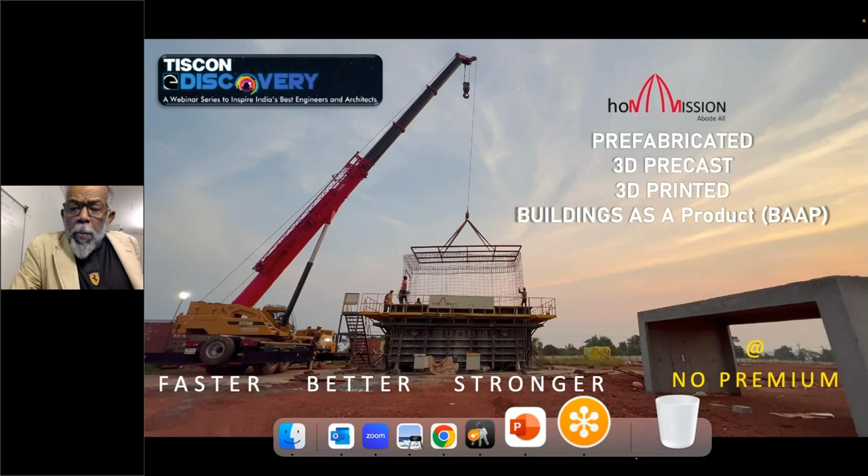Now, when we do this, can we deliver the building faster? Can we deliver better buildings? Can this building be stronger? And most importantly, in Indian context, can we do faster, better, stronger buildings without charging an additional premium? Yes, we can. And that is what we have done in the past about 10, 11 years. And that's the discovery we will get into now.

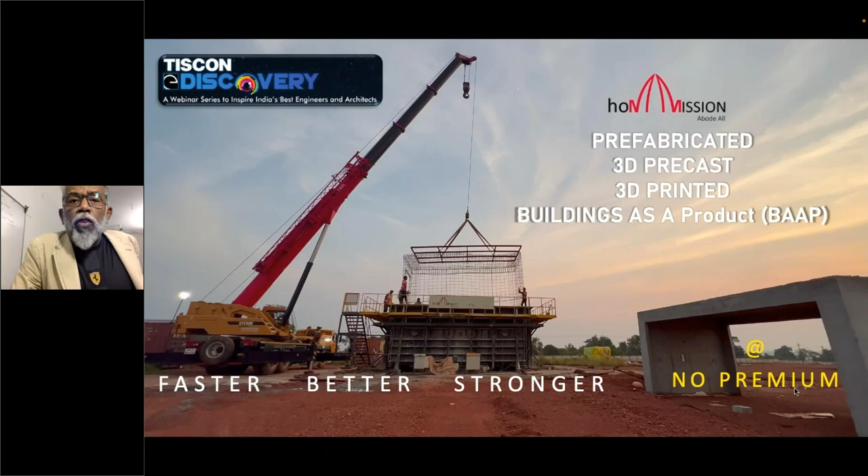That was in use ever since the Second World War. And in Singapore, for periods like 40 years, it was on. And it had its own advantages as well as challenges. We were talking about level 2, how you can manufacture, let us say, an RCC building as column separate, beam separate, wall separate, and join them together to make one room. It had its own advantages. The challenges were too many joints, too many connections, and hence possibly an extreme level of workmanship required, and managing these kinds of multiple pieces was proving to be a challenge in various ways.

Hence, the industry moved on and said, can't we make the whole room in one single pour, as one single piece without any joints, and then connect those rooms together to create the building? This whole movement from level 2 to level 3 began way back in 1997, but it got adopted in different continents and different countries gradually. As you know, in construction, everything has to be tested, proven, accepted before it is deployed. So this level 3 started happening somewhere around 2010 onwards. In Singapore, they call it PPVC, precast, pre-finished volumetric construction. In Hong Kong, they call it modular integrated construction.

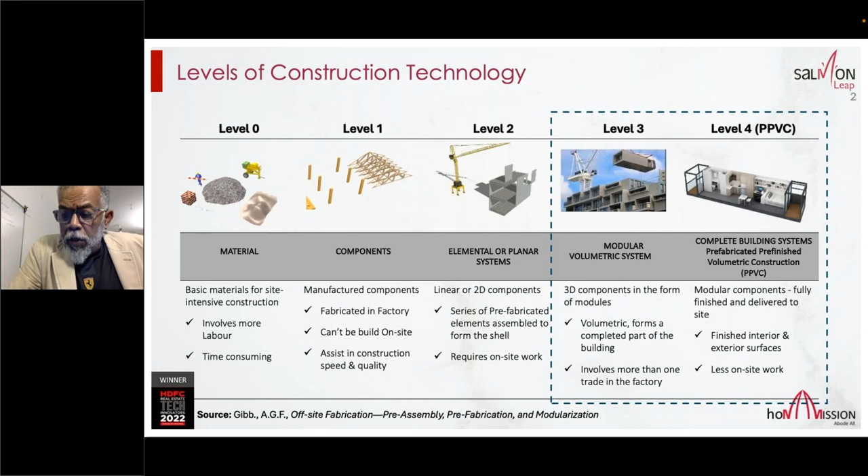So what are we doing in India? We jumped straight into level 3. The 5 sides of the room can be manufactured in one single pour, made at the site itself, and erected into a building. That's what I want you to discover today. I'm changing to the next slide now.

I will now continue with precast, pre-finished volumetric construction. Like I said, these modules are 3-dimensional and they are freestanding. They don't require any propping or any support at the time of erection. Internal finishes, fixtures, fittings can all be done in the factory itself if it is a 6-sided module, and we can manufacture it either at site or away from site and bring and install.

Now, obviously, all of you would have guessed there are lots of advantages. You could increase the productivity per person up to 40%. Today, we have increased it far higher. You would see how we did that. Since the Singaporeans did it in 2011-12 onwards, it's more than a decade. We have changed a lot of things. Because it is manufactured in a factory, it is like a manufactured product. Quality is assured. It is not left to the hands and skill of the worker anymore.

So if we have to do all of this, what is it that we had to achieve? We had to look at things right from the design stage itself. In these 10 years, for those of you who are architects attending this, we today have a practice in architecture which is called design for manufacturing and assembly of buildings. In Singapore, they call it DFMA.

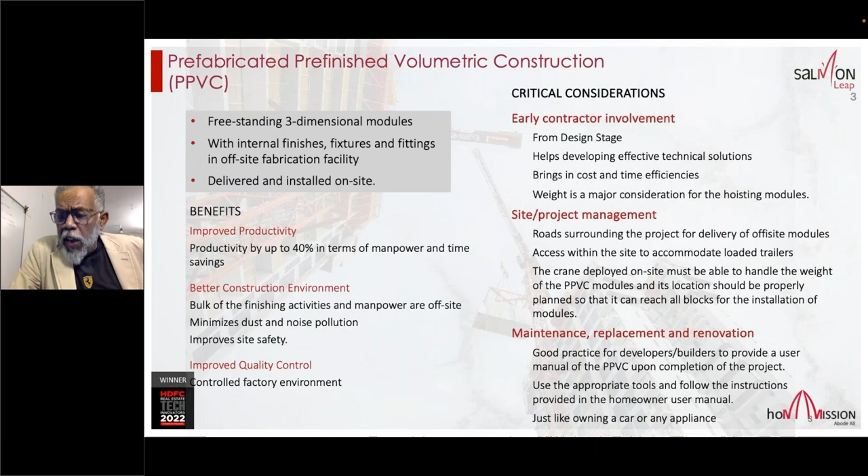And do we have standard practices documented and issued for this kind of manufacturing building as a product? It wasn't there about a decade and a half ago. It was still in the works. Today, all of them have become available from different countries and are being adopted for the Indian situation. So having said all that as the background, let us look at it from the structural point of view, from the architectural point of view, and also from the MEP point of view.

If we're talking about manufacturing building as a product, it is not just the structure, not just the rooms. Whatever has to go into those things also has to be designed for manufacturing, and the entire ecosystem has to be in place. Has it come into the country? Yes, it has come into the country. Has it come to the level that it is in Singapore? Not yet. Have we picked up momentum? Yes, we have picked up momentum.

You would see in the subsequent slides how Tiscon, over these 5-6 years, as far as the reinforcement, joints, connection is concerned, how they have productized, how they have removed the need for tedious labor involvement. You would see that. And in MEP, similar things have been done. Can we have modularized MEP, which is available, which can be installed straight away?

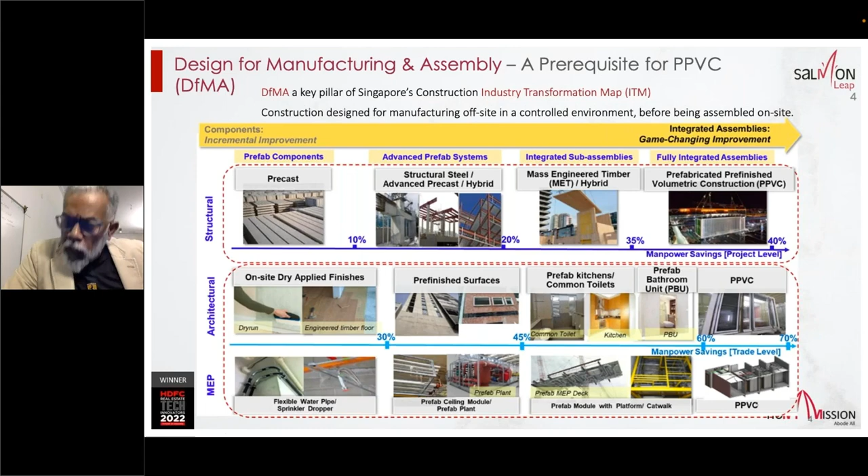Yes. So as you see in the last column, PPVC, we have structural PPVC elements available. We have architectural PPVC elements, including ready-made bathrooms with all the plumbing lines available. We just delivered one yesterday for one of the large companies of India. And we are right now working on getting the MEP also modularized, so it becomes truly designing for manufacturing and assembling the building as a whole. That is where we are.

So if that is the case, some of you who are engineers and architects there would be wondering, how do I get into this? What are the things that I need to achieve if I have to succeed here? Fundamentally, the 3-4 points which we need to do is, can we reduce the total number of components that make the whole building?

If we have made it more and more integrated, a whole room, or a whole room with balcony as well, or a whole room with balcony as well as the floor, or with whatever has to be installed in that, the further we go, the lesser the number of components that have to be handled, which means it reduces the assembly cost. It reduces the work in progress. Otherwise, too many elements are WIP and their inventory holding happens. And minimizing the number of components also enables or simplifies the automation.

Now, another principle that we try to follow, which DFMA prescribes and teaches us, is how do we design it not only for manufacturing and assembly; at the time of fabrication or manufacturing, how do we simplify the geometry without unnecessary non-functional features, which in conventional construction we have been adopting extensively. The more we standardize, the fewer molds we require, which automatically reduces the capital expenditure the project requires. So that is another principle we try to follow.

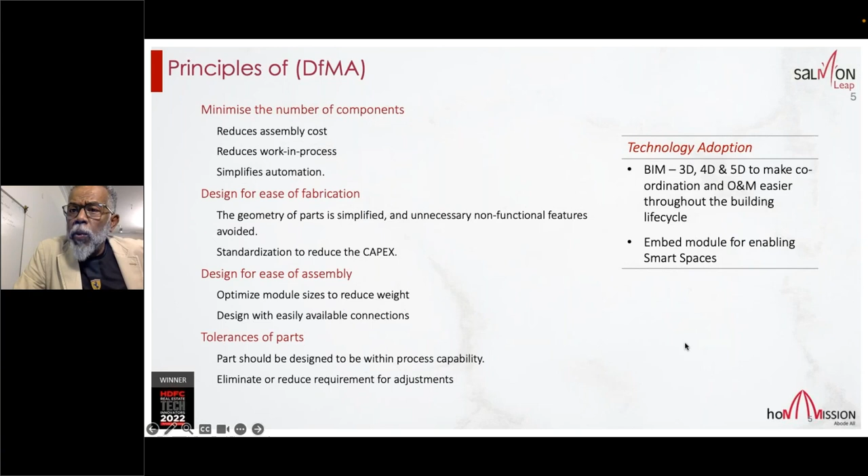Now, all of you, particularly those of you who are the engineers and the architects already know, beyond the hype of BIM, we have now started actually using BIM, at least in projects like airports, in projects which are now coming up, like for the semiconductor. In these areas, we do use BIM extensively because the tolerance there is extremely limited.

So, in addition to all of this, how do we take into account the transportation requirement if we are not manufacturing at site? If we are manufacturing at site, we have more elbow room. Otherwise, we have to make sure the dimension of each of the elements is as permitted by the Indian motor rules. We have examples of how they are moving on Indian highways, whether it is a windmill or the car manufacturers, from the northernmost part of India to the southernmost part of India.

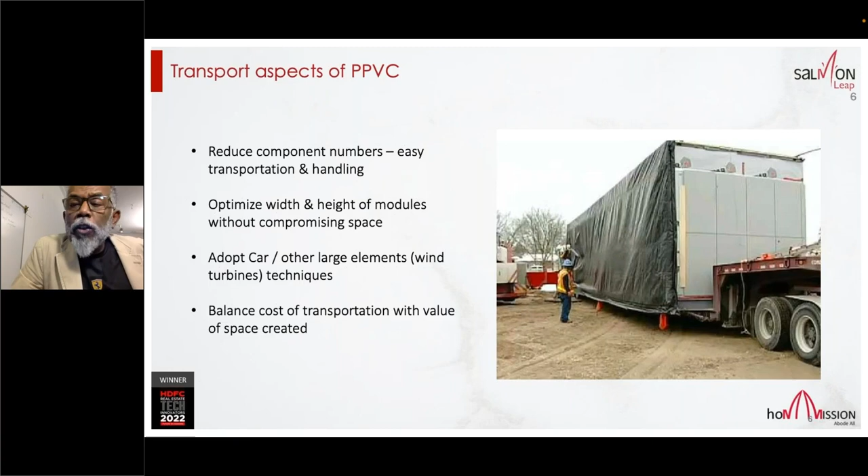So we do take these guidelines which are available there to size the rooms or the manufactured part of the buildings, and there we keep in mind the cost of transportation versus what is the value of the module we are transporting. So that dictates how much distance we can transport if we are going for offsite production. Okay, so that is all the design principles.

Now, can we have one mold, one machine giving us different lengths of room, different heights of room, different wall thicknesses, different openings? Has the system matured? Good news is yes. Now, from the same machine, you can manufacture a 3-meter tall module or a 3.125 meter tall module or half the height module. Length can be full length, half length, 3/4 length. Wall thickness can vary from 90 mm from the same machine to as much as 200 mm. So the technologies or the methodologies that are now available in India permit all of that.

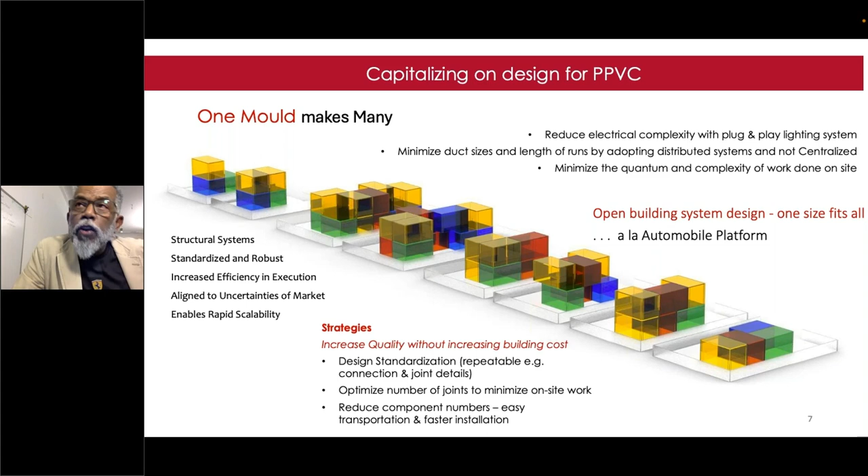Okay, is it only concrete that we are talking about? No, it can be a pre-cast or a fabricated module. If you are talking about a prefabricated module, their structural elements are steel. The rest of it can be any other material, whatever is suitable to the building code, the seismic zone, and the climatic condition. Both are available.

In the case of concrete, it is typically monolithic, one single pour. All walls and slabs are poured in one pour, no joint. If you're going into steel, obviously you need to have structural elements in steel, and other material which is sustainable, which is thermally more efficient. You can use those things.

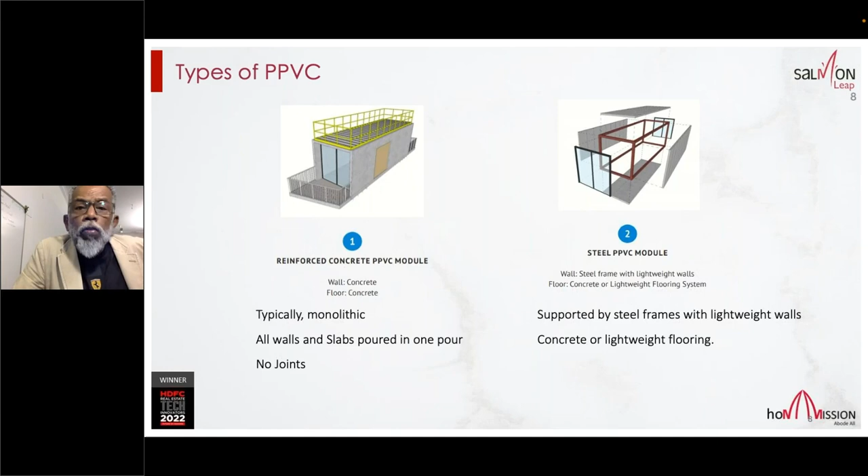How far have we come in 3D printing? I'm sure all of you are tracking. Today, we do have prototypes or example sample projects, whether it is a bus shelter, a single unit printed inside IIT, or a post office. These things are happening. What is holding it back? Advantages: you can design a building, feed it into the system. The system will feed it into the printer, and the printer will print the whole structure.

What are the disadvantages? Can it take reinforcement? Not yet. Do we have high-rise buildings that can be manufactured and installed? Not yet. It will come right now. If you want a curvaceous shape, in all these examples which have been done in the country, you would notice these are all non-linear. For those things, the machine can be taken to the site and manufactured at the site.

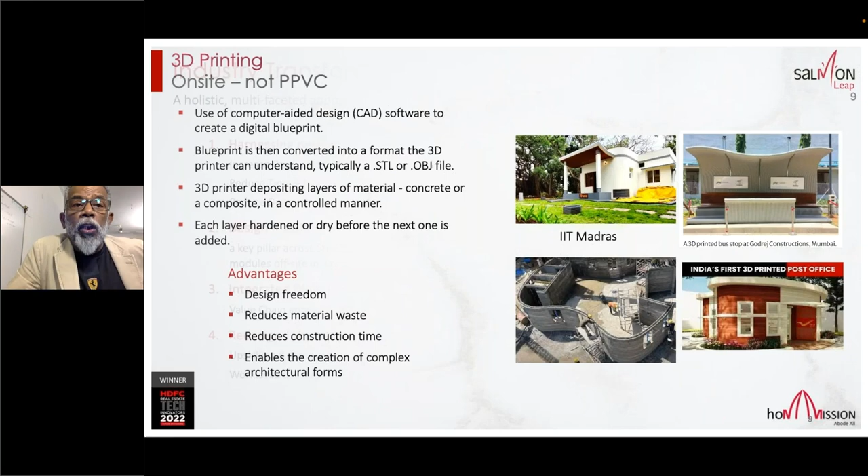So all of you here attending this, hundreds of you, and us, if we have to move construction from labor-intensive, manual, sequential, fragmented into manufacturing with guaranteed quality, there are a few things that we need to do. We talked about design for manufacturing and assembly. We can now talk about: can we deliver the whole thing, from procurement to planning and execution, handing over, by one entity?

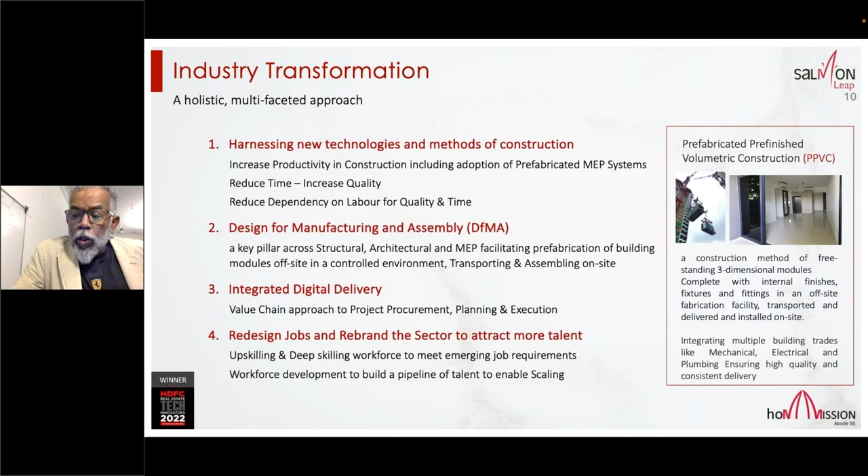Yes, it can. And what are the technologies that are available? We only talked about one of them so far in detail. The rest of it is all maturing in the hands of different people and different entities. So has it gone beyond DFMA? Have countries pulled in academic institutions, building material manufacturers, building product manufacturers, and have they all arrived at certain common rules to design for manufacturing and assembly? Have they started creating platforms? Have they written rules for platforms?

The good news is yes, we can share all of this. This is an effort by 600 plus companies, plus universities, plus governments. They have worked on this for 5 years. And this is what we have brought into the country through the joint venture with Indian Institute of Science. As you can quickly see, the rule book says whatever you are designing and creating as a platform, it should be deployable and configurable as you need, and it should have as many common repeatable elements as possible.

This is not new. This is what the manufacturing industry has been doing and how it has evolved. It is just being adopted in the construction industry so that we can shift it from manual to manufacturing. The interfaces also have been standardized, and it should be an open platform. It is not proprietary. That is why all these companies came together into the Construction Innovation Hub and made these things available. And the three critical parameters: one, it should be recyclable. It should be circular economy.

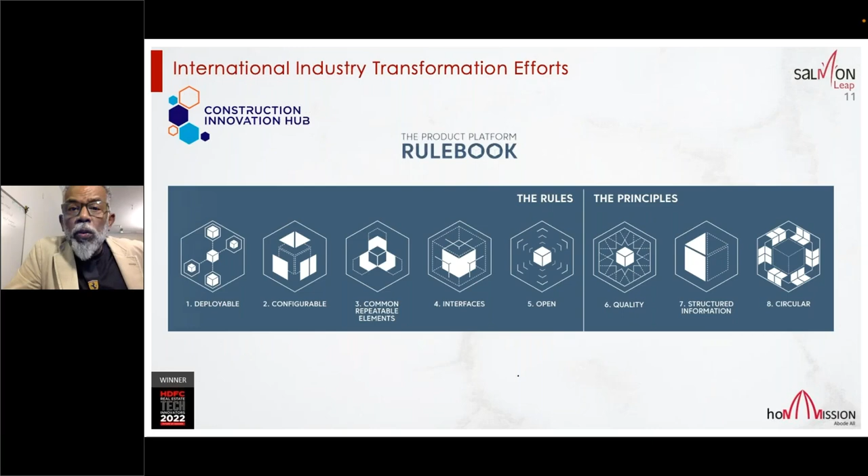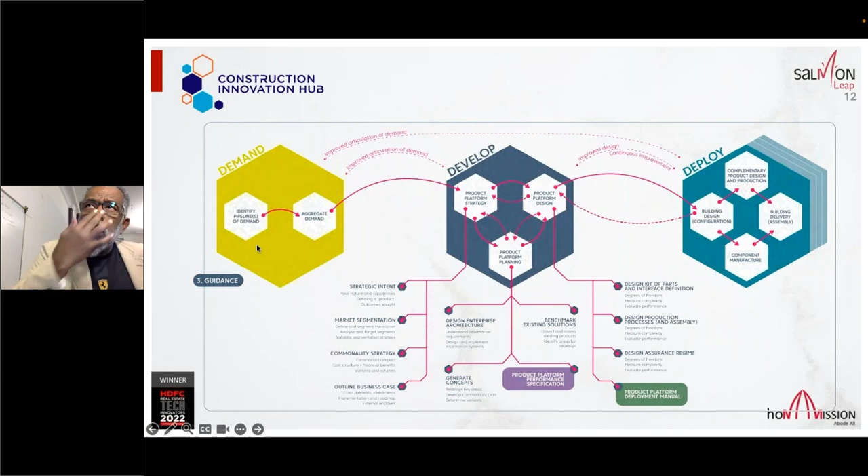What have they done to ensure this? These are all laid out in this. And structured information: it should flow across the value chain, across different platforms, without any proprietary hold. And quality is key. This has already been achieved, and it is being brought into the Indian market. I don't know whether we will have time to dive into the details, but we could do a deep dive into what the Construction Innovation Hub has done, starting with what demands are crying out for this kind of design for manufacture and assembly.

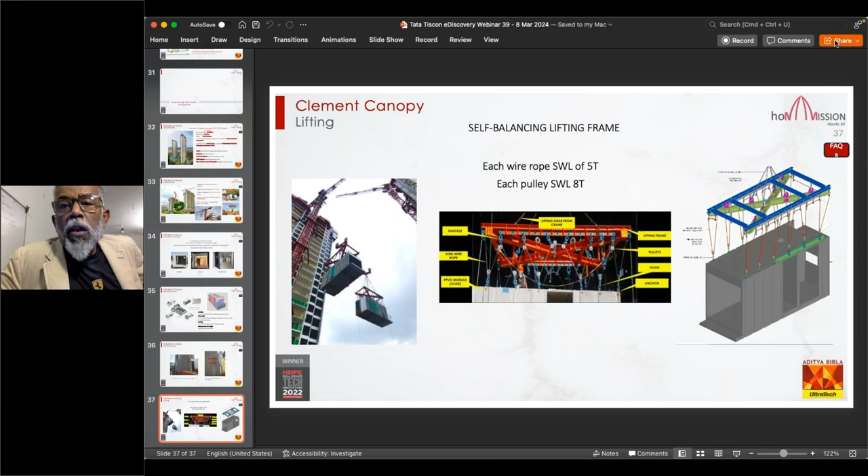First question that we have is from Amrit. She wants to know which of these systems are eco-friendly. Yes, it is as eco-friendly as a concrete building can be. The other elements of eco-friendliness are that we are avoiding waste, saving time, and reducing the quantity of material. From those points, yes, in comparison with other RCC buildings, they are. But if we want eco-friendliness by changing the material, then we have to look at alternate material, embodied carbon, and the consequent sustainability criteria. Vis-a-vis concrete, yes, not significantly, marginally.

Okay. And what about the seismic performance of these buildings, sir? This is a question by Ravindra. Like I said, you should take a look at the notification issued by the Government of India, PWD. They have recommended this for all types of buildings, all heights of buildings, up to seismic zone 4. If you are going into seismic zone 5, then the connection details require further strengthening.

That is from the government or regulation point of view. But intuitively, as an engineer, as an architect, or even as a layperson, you would have noticed every single rebar that goes into the structure is cross-connected in both the directions. You know, the seismic resistance we bring by cross-tying the load-bearing elements. The columns are cross-tied. Here, every single rebar is cross-tied. Hence, by design, it tends to be far superior to face seismic challenges.